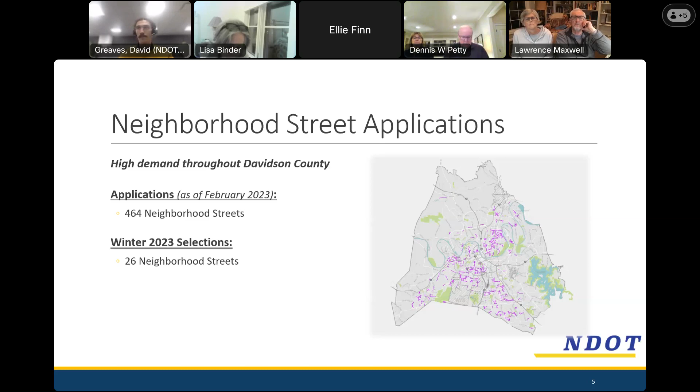There are a number of things that you can ask for outside of the Nashville traffic calming program. So Hub Nashville is a really good spot for kind of anything like miscellaneous requests about signs, signals, crosswalks, sidewalks, things blocking the road, trash, you name it, they do it all. So we would just like to plug this before we kind of go into exactly what we're doing so that everyone knows if there's an issue that we're not planning on covering tonight, there are other places that can help out.

So before we dig into some more specifics about Cross Creek Road, does anyone have any questions about what we covered so far?

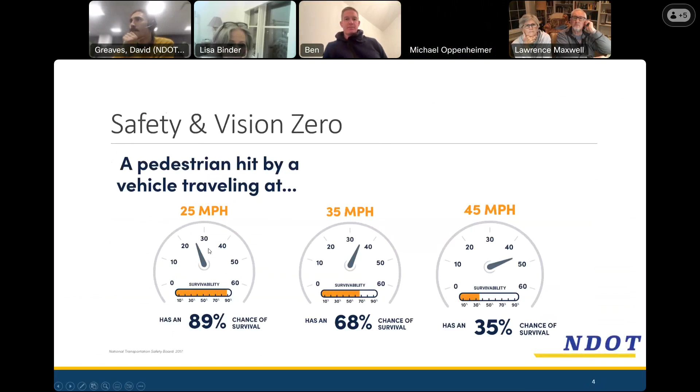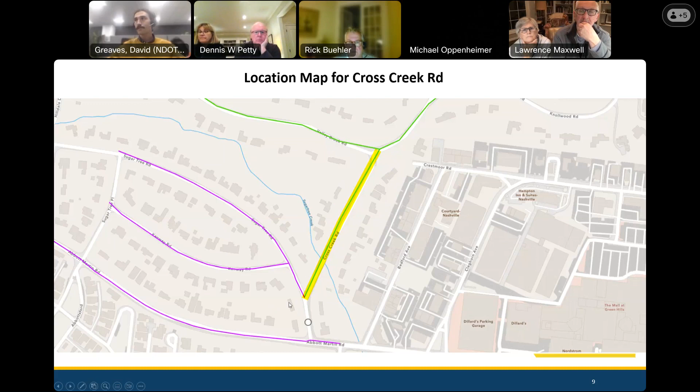So any questions about that before we dive into the traffic calming programs toolkit and some options for the street? I have a question for you - you mentioned about 3,800, what date, what period of time is that? Oh, I don't know the date off the top of my head.

It would have been within the 6-month period after the application for Cross Creek was submitted. One of you might know when that application went in. I don't, I could look it up, but basically we have a company that does traffic counts come out and set up equipment to measure a few days worth of data and use that.

I don't have a question, but just a quick comment that I'm not the least bit surprised with the volume count - a little surprised, or quite surprised, that even more people weren't driving faster than 38, because I can stand out in my front yard at any given moment and see people I know doing 50 plus coming down the street, but it is what it is.

No, like I said, that 85th percentile mark isn't really the whole picture. If I went and drove 70 miles an hour down Cross Creek Road 10 times, it wouldn't really have an effect on that because it's just out on the edge of that distribution. But anyway, when we get that feedback, and we do get it a lot, I'm compelled to reassure everyone - you've been selected, you've hopped over the bar, and we'll get something installed should you all choose to proceed with it.

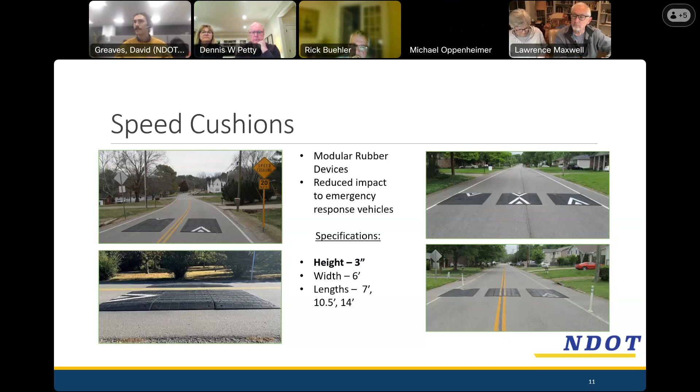We generally try to pick one that is going to have the desired effects. So if it's a really dense, grid-like environment and we want people to be going slow, 7 feet is sort of that default option. 10.5 and 14, you still get the full bump, but it's more of a gradual up and down. So those we use on collectors or places where you have a lot in a row, and that's really just to calm traffic but not be so obnoxious about it if that's not really desired.

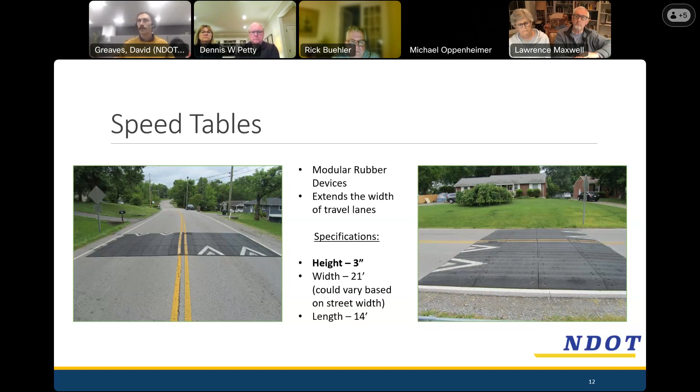There are also speed tables. You'll see these around Nashville. They work the same way - you go up 3 inches, you come down at the other side. Like I mentioned before, we generally don't prefer these. They're pretty massive, so it's more of an ordeal to install, and they have the same effect on emergency vehicles as they might on cars. So we try not to put those on routes where we might imagine an emergency vehicle would go. Really, they're mainly only considered when you have a dead end, cul-de-sac situation where you don't have a lot of network traffic cutting through.

This is a study that NDOT did. It's a little limited in its sample size, but essentially they wanted to verify that all this work they were doing was having the intended effect. So in Nashville, they took some data and observed that the before and after speeds did reduce quite a bit. The average was 31 down to 22, and the 85th percentile came down from 37 to 25, averaged over those few streets.

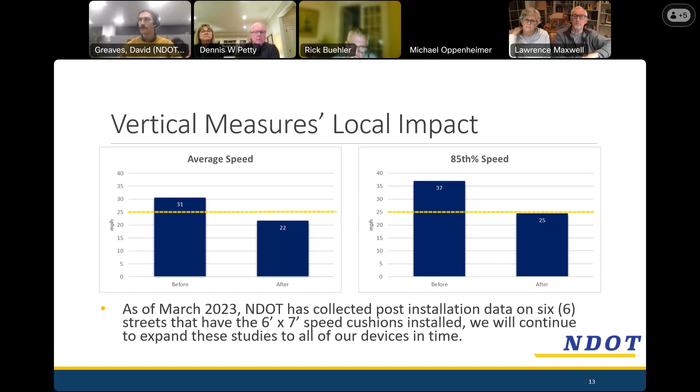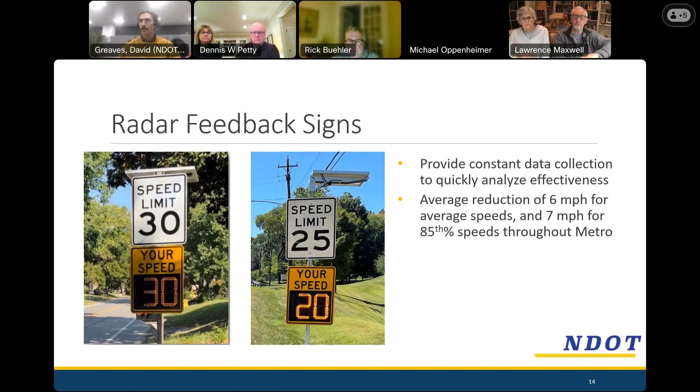Outside of vertical measures, there's a few other more fringe options that we pull out in certain situations. Radar feedback signs are one - I'm sure we've seen these before, but it'll flash at you if you're speeding and let you know what your speed is. These tend to have a positive effect initially, but once people get used to something like a sign, our brain kind of stops paying attention to it. So we don't usually lean on these as a first option, but they can be a supplemental measure. Say you had a long, large hill and cushions weren't really going to work, we might slide a feedback sign in there to help deliver the message as a driver is going down a street.

We can also do pavement narrowing. Some streets in Nashville are much wider than they really need to be, and that makes a driver feel comfortable going a little bit faster than we might want them to. So what we can do is stripe a road so that it looks narrower as you're driving, and that psychologically suggests that maybe you ought to go a little slower. That's probably not going to be implemented on Cross Creek, just because if we were to narrow it, it would be by like 6 inches, so it wouldn't really do a whole lot compared to the existing condition.

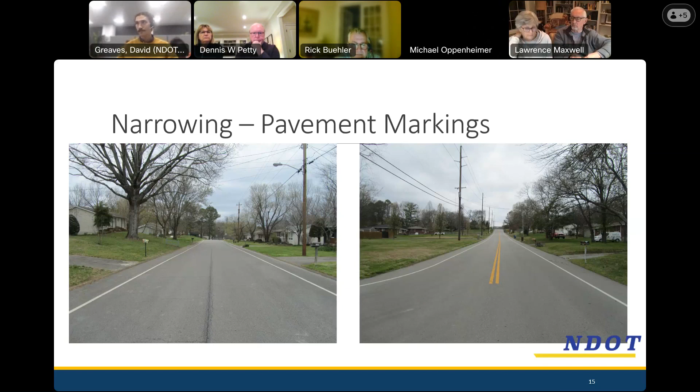Traffic circles probably won't be considered here. Essentially, they work when you have two very wide streets intersecting, giving you room to put one in and feel comfortable about left turning movements. Both intersections on either end of Cross Creek are more like three-way setups, so these wouldn't work quite as well.

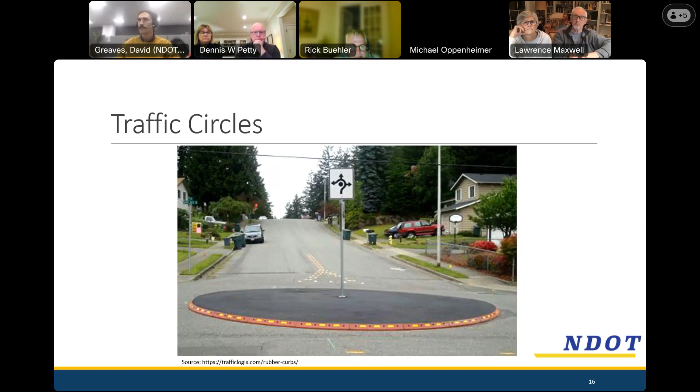Bulb outs and chicanes are more on the miscellaneous side. If you have a really wide street, like Fairfax in Hillsboro West End neighborhood, essentially it's narrowing but adding a wave to slow cars down by making them maneuver. Bulb outs similarly shrink the amount of pavement drivers have to work with, forcing them to slow down to maneuver the turns.

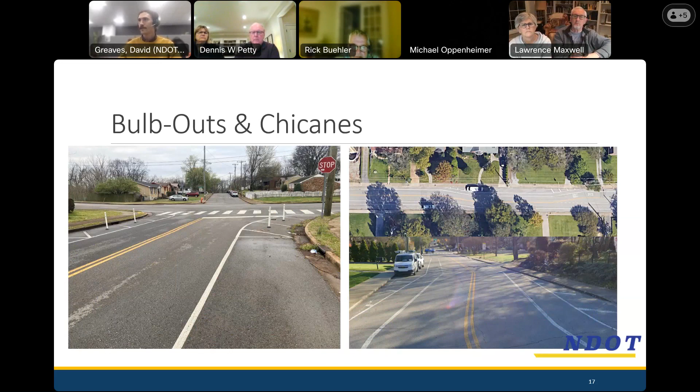So that's kind of it on the toolbox. Do y'all have any questions before we move on to what plan we're thinking about for Cross Creek?

I just have a quick comment. You mentioned emergency vehicles, and in the last 4 years I can only think of 2 times I've seen an emergency vehicle come down our street. Oh interesting, I want to speak to that. We're on the corner of Cross Creek and Valley Brook, and I've seen more than 1 or 2 emergency vehicles. So they do come through.

Okay, well that's fine. We're not really considering tables here, and I think with a road as narrow as Cross Creek, cushions basically do the same thing. So we will probably not run into any trouble with emergency services. They're generally just fine with the measures we put in.

So if anyone can see my screen, we're looking at the map of your street, Cross Creek, highlighted in purple. I put a stop sign on Valley Brook indicating where we all come to a four-way stop if turning left or right there. There's no stop sign as Cross Creek turns into Sugartree, and there's a crosswalk over here. That was something we noticed and flagged to bear in mind while doing our design.

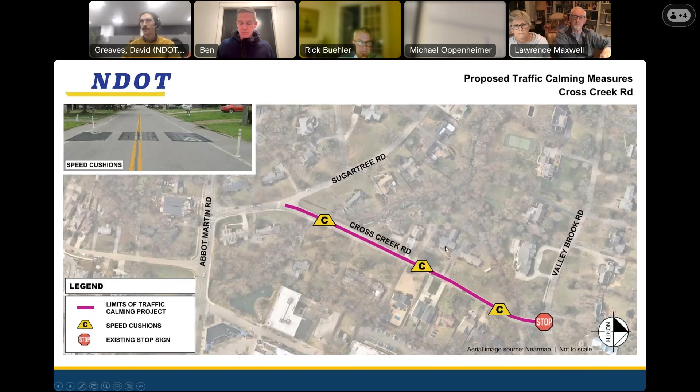Is there anything else that would go into the meeting 1, meeting 2 decision? We're more than happy to have it if anyone would like to, but I don't want to hold y'all up if everyone is wanting to move quickly.

Is there a time limit on voting? When does voting expire, after say a week? It expires 6 weeks after we believe you got the mail. So what happens is I'll prepare a mailing list, the ballots, the cards and everything. We send that to a mailing consultant, and we'll make it due whatever Friday is, like 6 or 7 weeks after that, so the voting cards will have that date on them. Once you get it, you'll know.

Six weeks is usually enough time for anyone who wants to vote to do so. We definitely encourage you to remind your neighbors, maybe post on a Facebook group, just spread the word that the vote is happening. I'm guilty of not checking my mail well myself, but it's unfortunately the only reliable way we have to reach the group we need to reach.

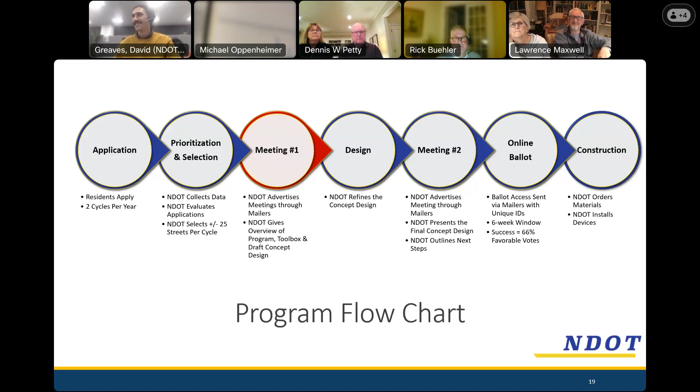This is Stephanie, I have a question. In terms of who's actually voting on it, is it residents that aren't on Cross Creek that could possibly vote, or is it just the residents where the speed bumps are going? That's a great question.

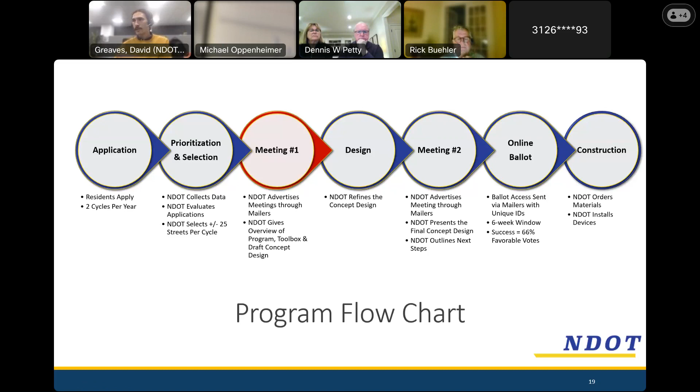So it is any owner of a parcel that has property abutting the right of way. So every house and lot that is touching Cross Creek Road will get a vote. I don't think this is the case for any of these, but if it's a business, for instance, they would be excluded, or some other use that's not somebody living there. So it's residents that vote, not the sandwich shop or something operating on the next street over.

All that is to say, there may be a couple addresses on the edge, addressed like Valley Brook or Sugartree. If their lot touches Cross Creek, they'll get the mailer. Does that make sense?

Yes, thank you. I just want to ensure, well, I can't ensure, but that the people that wanted them gone aren't part of trying to do this again.

Yes, I understood. NDOT prefers for the people most affected by the speeding to be the ones deciding, so that's one of the reasons that policy is in place. This is y'all's street. If 1,000 or 3,000 people use it to cut through, they would obviously not be motivated to vote for traffic calming on Cross Creek.

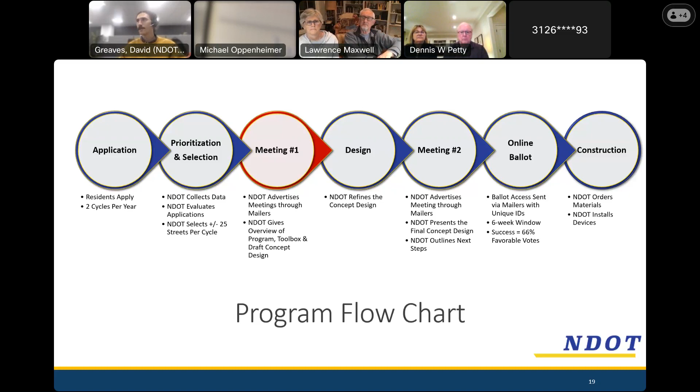Will you be reporting back on the ballot voting? So what happens with the ballot is everyone receives the mailers in their mailboxes. You'll submit your vote, and then 6 weeks later once the ballot closes, we'll count them and publish the results to the website. It'll be available online, and somebody at NDOT will get with the applicant and the council person to let them know. So there will be some follow up, but not a huge neighborhood-wide announcement.

I probably know the answer to this, but is there any way signage or something can be done in the interim while this process is going on? I only ask because there are so many pedestrians walking down Cross Creek going towards Green Hills, and I still don't understand why we don't have sidewalks, but somebody's going to get hurt. I see it all the time.

Yes, the answer to that is not with this project, but I would definitely encourage you, if there's anything like that on your mind, to submit a hub request, because that will go straight to NDOT staff. They'll decide what to do about that request, probably do a little bit of analysis.